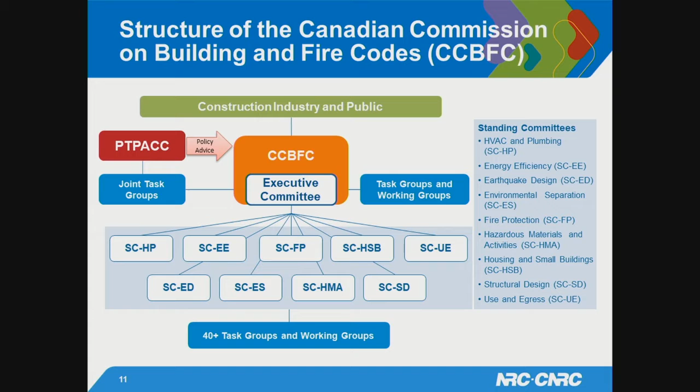And we have the Standing Committee on Use and Egress. So although I'm the team lead for the Standing Committee on Housing and Small Buildings, there is what we call cross-committee coordination. There are always things in Part 9 that might be affected by changes in Part 3, in Part 6. So we make sure that cross-committee coordination is done properly. And any standing committee could have task groups to address special issues. Like the Standing Committee on Housing and Small Buildings, as we speak, we have a task group on stairs, a task group on radon, a task group on basements, and so on.

So the code development process is also open and transparent. It is also a continuous process that makes consensus-based decisions, as I said. It has some key features, such as balanced membership by region and interest categories, and substantial public involvement. The public is mainly involved through being proponents of any code change. I'm also part of this public. As a technical advisor, I can decide to submit a code change request. And you can submit a code change request to any national model code, the National Building Code or Fire Code.

Consensus is an important word when developing codes, and it's an important word for the code development system in Canada. And here is a definition of what consensus means. Simply having a vote that passes is not enough. All opinions need to be considered and weighed. Any standing committee makes sure through the chair and the members that all opinions were considered, even if the person that expressed that opinion doesn't change his or her opinion at the end, and we can record this in the minutes.

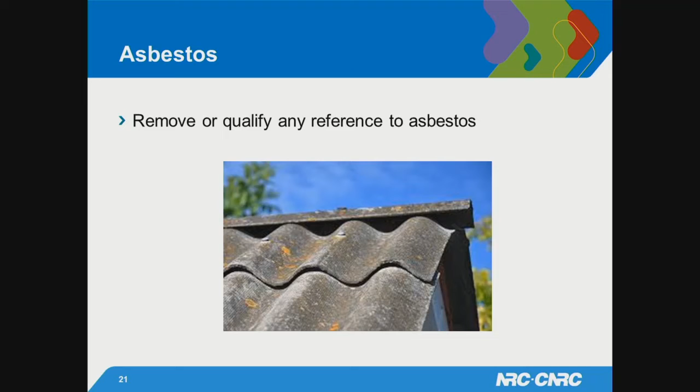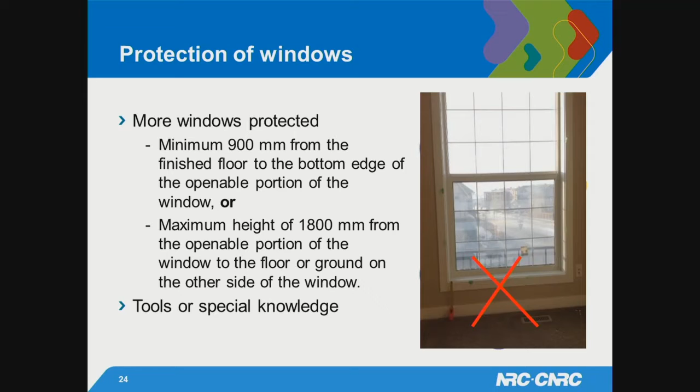We got really great feedback during the public comments. I think we had close to 120 comments from doctors, nurses, parents, health community people saying that they have been waiting for this change for so long, and it's great for our codes to have this as a minimum requirement protection of openable windows.

Home type care occupancy. This is something also coming into Part 9. With the aging of the population, there is a demand for affordable lodging in a home type environment for people with a loss of autonomy, especially in remote places and small towns and villages where they cannot build B occupancies under Part 3. It's very expensive. Care occupancies right now are not allowed to be constructed under Part 9. We should go to Part 3.

And Part 3 requires automatically sprinklers, area of refuge, and so on, fire compartments, because in case of emergency the plan is to keep people inside, because it's very difficult to evacuate these kinds of people outside. So everything is based on keeping people inside.

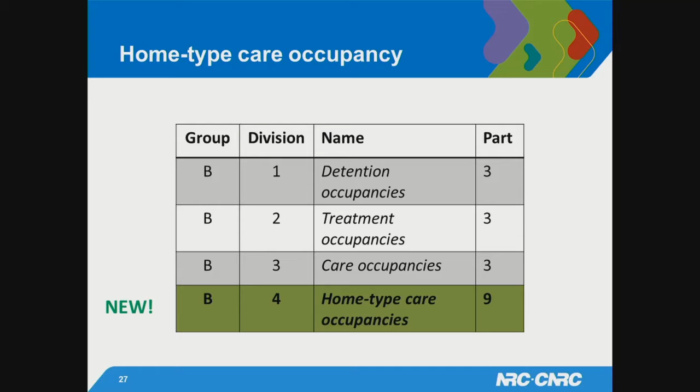So existing B care occupancies, like B1, B2, B3, are based on protect-in-place measures, such as sprinklers, to compensate the difficulty of conducting a full evacuation, as I said. B4 requirements ensure adequate means of egress that allow the full evacuation of residents in a timely manner. No need for sprinklers, and no need for other features like area of refuge and so on. This requirement will facilitate even an alteration of an existing building into a home type care occupancy.

What are the other conditions? We maintain that all the residents should be on the first story. Even if the house has a basement or second story, they will be used for kitchen or other use, but the residents should stay on the first story. Two barrier-free egress paths, including ramps, will be required, and a fire alarm system and fire safety plans are also required. Those are the main requirements to have a B4 home type care occupancy.

And for those of you living in small villages and remote locations, sometimes you have people that need to be treated in small care occupancies. Instead of sending them hundreds of kilometers away from their homes, they could be just next to their parents and be safely treated, and it's going to be good for the health and the quality of life of people.

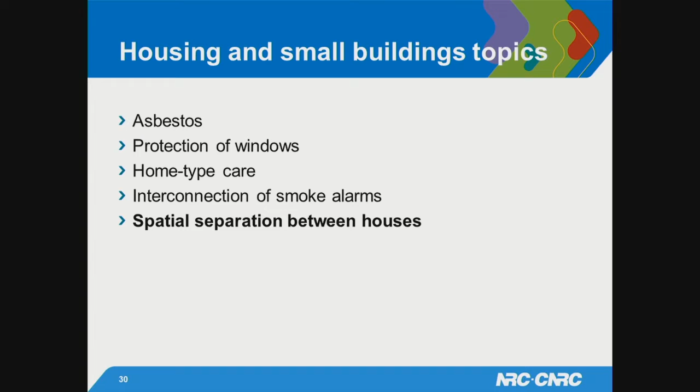Spatial separation between houses. I know that not everyone is very familiar with the calculation of the exposing building face and how to calculate the area of glazed openings in the house. But for houses, we can take portions of the walls to calculate the maximum glazed openings. The closer we are to the property line, the less percentage of opening we have. This is the basic calculation.

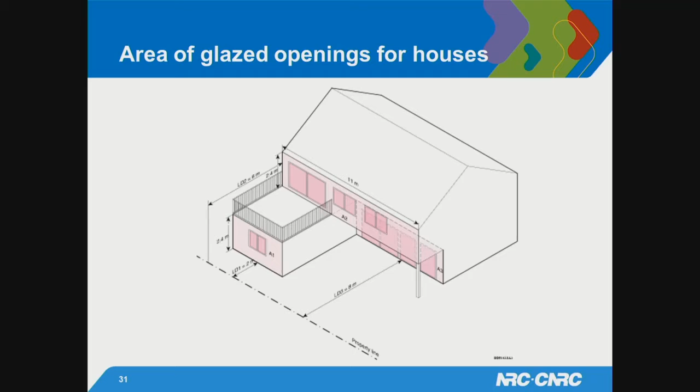So by doing so, I can have less opening because I am close here, but I will have more opening on this wall because I'm away like 8 meters. And the code uses vertical portion of the wall. And the word vertical portion is causing some problems when we have something that looks like a horizontal portion of the wall. And we can see here there is a horizontal portion, and this has also created some misinterpretation.

People that do not know exactly how to use this think it's a vertical portion, not a horizontal portion. So what we did, we went back to the first time this came into the code, and we realized that it was never meant to be vertical portions, just portions. We can divide the exposing building face into multiple portions, whether they are horizontal or vertical. So by this, the National Building Code corrected some misinterpretation and some enforcement implications for how to calculate the area of glazed openings for houses.

So those are the 5 main changes that we know will be in the next edition of the code. Now I will go into another group of proposed changes, because they are still at public review and the comments are not yet reviewed. So we don't know if they will end up in the code or not. As we speak, we are receiving more comments. And all the comments for the group that I'm going to present will be addressed at the May meeting of the Standing Committee in Ottawa.

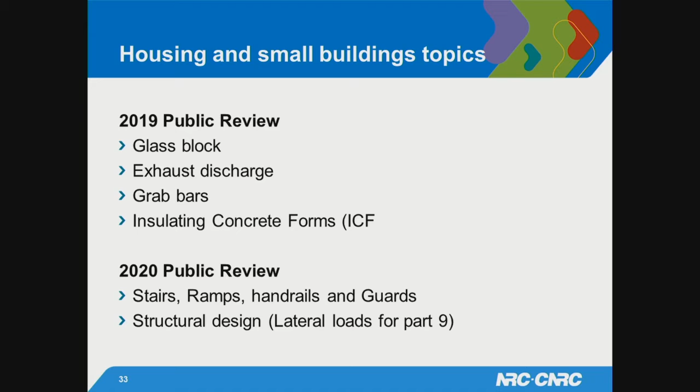The Standing Committee on Housing and Small Buildings will have a 3-day meeting in Ottawa. And the main purpose of this 3-day meeting will be to review all the comments, hundreds of comments, by the way, that we received from the 2019 and 2020 code public review. So here you can see the two lists, the handful of changes for the 2019 and 2020 public review.

Let's start with the glass block. Again, this is related to spatial separation provisions that limit the area of windows on the exposing building face to limit the spread of fire. In 2005, the provisions were divided into 2 sections. One section for buildings, Part 9 buildings, and another section for houses. In doing so, an existing requirement allowing for larger windows under certain conditions was only applied for small buildings. Somehow it was never applied to houses.

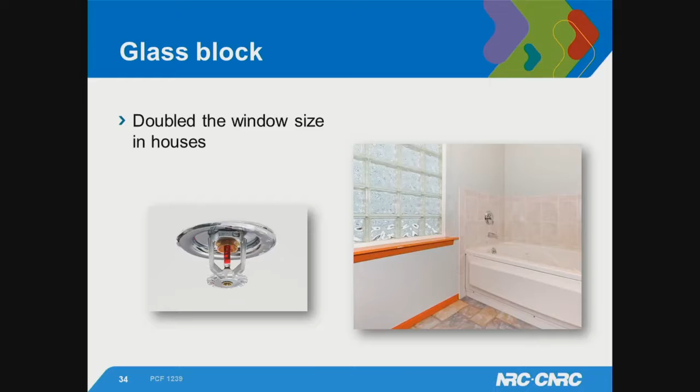So this proposed change corrects that error, and we're proposing that larger windows also be allowed for dwelling units if the glazed opening consists of glass block. We can double the area, or if the building is sprinklered. Clarification.

Location of exhaust discharge. Many bathroom exhaust fans and dryer exhausts are placed within the soffit, like here. The problem with this is that warm, moist air coming from this location, which is supposed to vent directly outdoors, can discharge into the soffit. It can re-enter the soffit, like it comes here, causing damage to the roof sheathing, trusses, insulation, and drywall. Approximately 5% of houses have this problem.

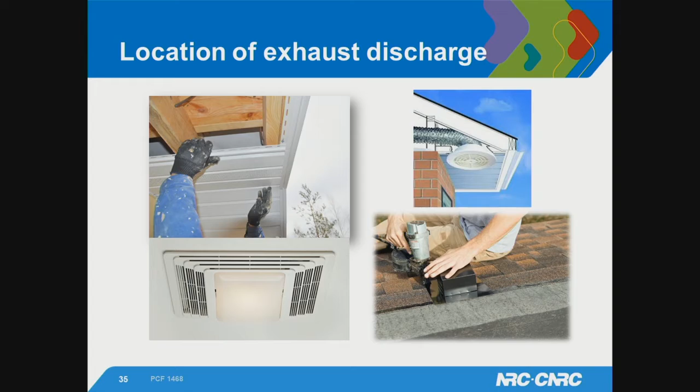So this proposed change introduces a requirement for unvented soffit extending a minimum distance on each side of the vent. We're requiring that if we have a vent here, we need to have unvented soffit 1.8 meters on each side. And if we cannot have this, then we can vent through the attic, vertically exhausting to the exterior. For example, with row houses where we cannot vent on the side, we can just vent through the roof.

Are you allowing for questions? Yes. I will keep the question period at the end. We still have how many? We're on time, right? We have 45 minutes.

Grab bars in bathtubs and showers. Currently, there is no requirement in the NBC for grab bars in bathtubs and showers other than in hotels and motels. Research has shown that slips and falls in bathtubs and showers are an issue for all age groups. Installing grab bars in these locations can reduce the risk of falls, because grab bars facilitate the transfer in and out of bathtubs and showers. The proposed changes add requirements for a vertical grab bar and horizontal grab bars. This proposed change looks simple, just grab bars.

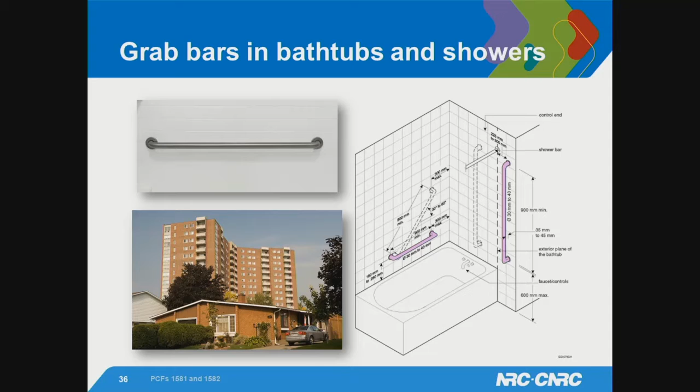But the task group has been working for 10 years because of the impact analysis. For the cost-benefit analysis, it was very challenging to find data about people falling in bathtubs and showers, what's the benefit, and what's the cost of adding these grab bars in all bathtubs and showers in all occupancies, not only in houses, everywhere. I think there were 3 tries before we got something scientifically based and recognized by the standing committee, and they finally decided to go ahead with this change. We received lots of comments, and we're going to see what will happen to this proposed change, not a requirement.

ICF construction, this is the insulated concrete form. The requirements for using above-ground insulated concrete form construction have been limited to only single dwelling units since 2005. The proposed changes remove this limitation and allow other building types, like up to 2-story buildings, to be constructed with ICF walls using prescriptive requirements in Part 9.

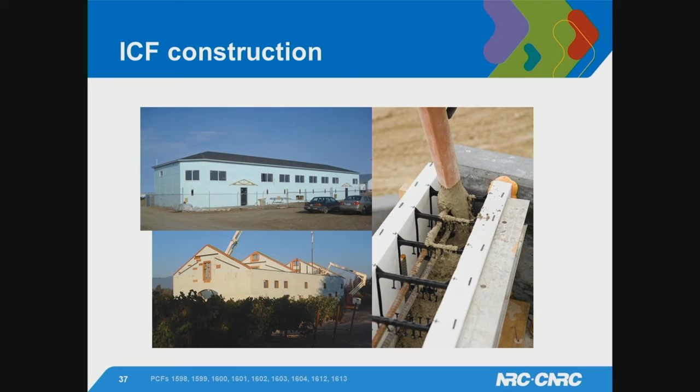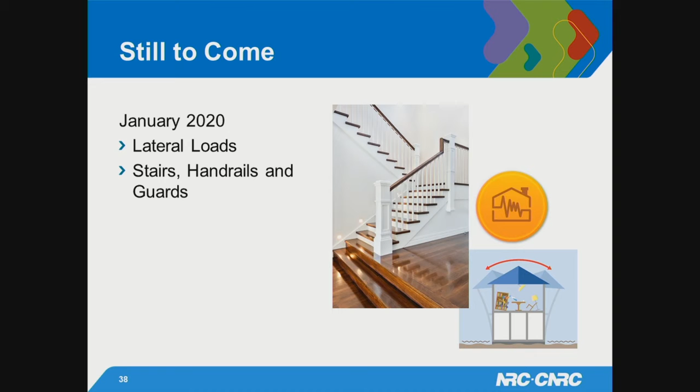This is for January 2020. I don't have the details about this, but there is a lateral loads requirement that's coming, and there are 6 proposed changes for stairs. They are not that significant, so I just mentioned them. But if you would like to know what they are, you can go to the website, go to public review, and you will have all the proposed change forms with the rationale, justification, and you can comment on the requirement.

Other changes to the national codes. As I said, I picked some changes from other parts. They are all health-related changes and also children's safety. This is from Part 6 of the NBC, and it's related to Legionella. Legionnaires' disease is a potentially fatal respiratory illness that is caused by exposure to the Legionella bacteria. These changes are intended to minimize adverse health effects caused by this bacteria.

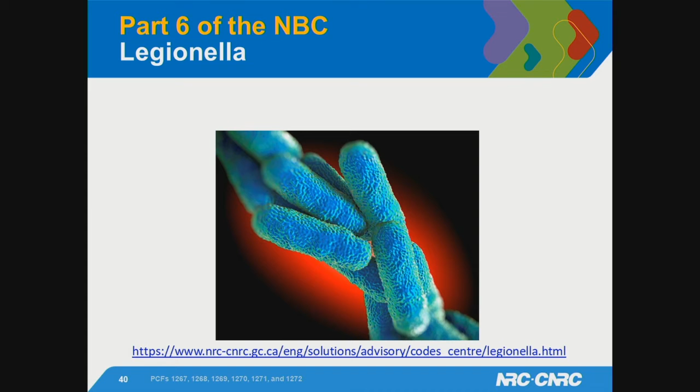We find this bacteria in swimming pools, domestic water systems, showers, ice-making machines, etc. Mainly where there is water and stagnant water. So there were revisions in Part 6 to requirements for various systems, air coolers, misters, humidifiers, drains, etc., to try to minimize the chances of bacteria growth, such as having water continuously flowing.

As we speak, there are all these coronavirus things going on. So the national model codes also look into some of this health aspect, to minimize the growing of certain bacteria in buildings. We report that there are usually around 100 cases every year with Legionella. And we do not count people who have pneumonia, and the people who have pneumonia might be affected by this. So it's a health issue in Canada.

I also have a couple of changes to the National Plumbing Code, because this is drinking water. This is for everyone, so I thought this might be of interest for you. One of the health objectives of the National Plumbing Code is to ensure that drinking water is safe for consumption. The NPC 2020 will refer to an NSF/CAN standard to ensure that users have products that are safe and meet the health requirements. So as a minimum requirement, now there is a standard to ensure that drinking water is safe.

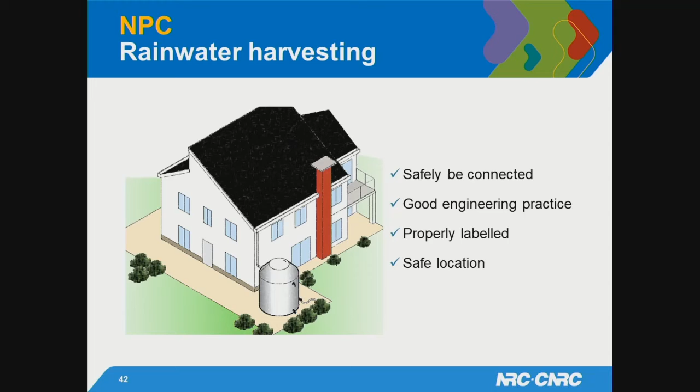The National Plumbing Code also, this is about rainwater harvesting. Do you have rainwater harvesting in your communities? No? Because it's becoming more and more popular, apparently. The NPC already addresses non-potable water systems, but there was nothing about rainwater harvesting systems, although they are becoming very popular. Changes will be introduced in 2020 to allow the use of rainwater harvesting systems, also known as rainwater reclamation systems. These changes help to ensure that connections between potable and non-potable water systems are done properly, using good engineering practice, properly labeled piping, etc.

This is again non-potable water, in healthcare facilities. The presence of bacteria, viruses, and chemicals in non-potable water may pose a health risk, particularly for persons with weak immune systems. So the changes specifically say no, we do not allow non-potable water in health facilities.

And this is safety glazing. This is for schools. This is about wired glass. Wired glass is used by designers, usually in fire separations. The problem is that there were a number of documented severe injuries resulting from human impact with wired glass, mostly occurring in schools. So the proposed change is for assembly occupancies. It's not in Part 9, this is in Part 3, and requires glazing used in locations subject to impact to meet a new requirement. This is an updated standard, meaning that traditional uncoated wired glass may not meet the new requirement. It will not be allowed.